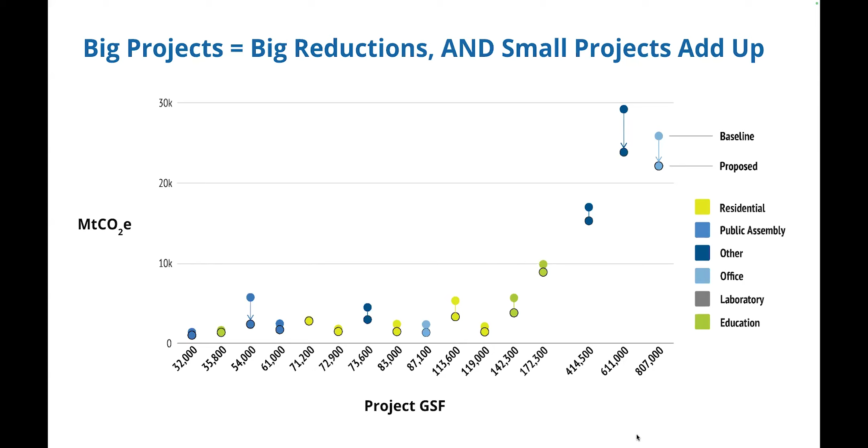About 50% of the participants, it was the first time that they were doing a whole building LCA. What we found was that the big projects had big reductions, but then all of the small projects, all of their reductions added up. And we really recognized that reductions were possible at every scale.

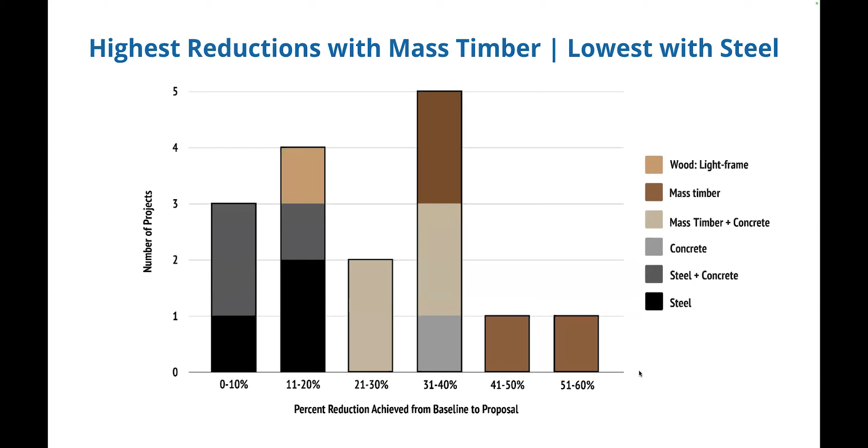We collected a group of judges, some of them who are on today, from outside of Massachusetts and around the country, who are experts in this field. And they judged the projects on 3 different things. Part of it was on the reduction in embodied carbon, but that wasn't completely it.

It was also on how replicable the project and the approaches were, and how cost effective they were, but then balanced with the innovativeness of the submission. So we really wanted to see how people could do innovative solutions. We wanted to recognize that, but we wanted things that other people could actually do. And so I'm going to pass it off to Aurora to discuss our winners.

Awesome. Thanks, Meredith. All right, so excited to share the winners with you all today. The first project we want to highlight here is the Sustainable Engineering Laboratories building. This building was meant to function as a national hub for UMass Amherst to accelerate clean energy research and educate young sustainable engineers. This project targeted ILFI Zero Carbon and LEED Platinum certification and took a really clever tiered approach to cost.

The first tier that they explored were opportunities that reduced both cost and carbon simultaneously. These were things like minimizing below-grade construction, steel tonnage reduction, and structural grid optimization. They found about $4 million in savings that were then reallocated to other project priorities. As the second tier, they looked at opportunities that had a very low premium that still delivered carbon savings, such as polyisocyanurate for the roof insulation and increased SCMs in the concrete mix designs.

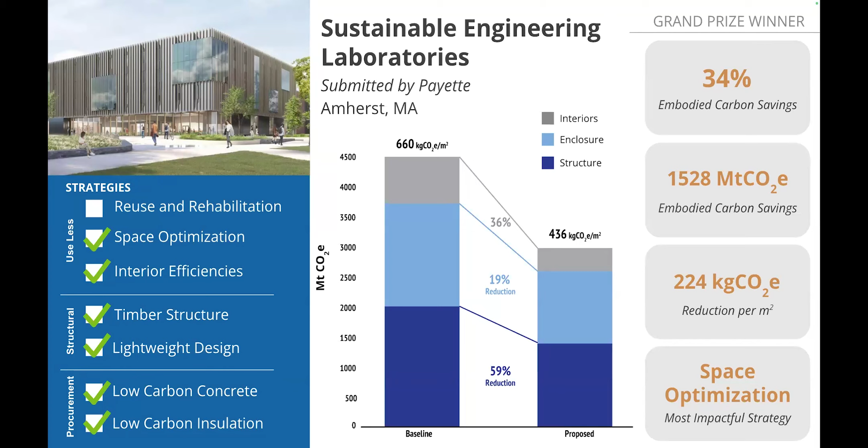They also looked at reducing floor-to-floor heights and optimizing the structural grid. They employed low carbon insulation, specifically polyiso instead of XPS for the roof assembly. And they redesigned their concrete mixes to replace about 50% of the cement with low carbon alternatives.

The second winning project is Jones Library. This is a renovation and expansion project with goals of improving safety, user-friendliness, and efficiency. Sustainability was a priority for both the owner and the project team from a very early design stage. Initially, this project had very high operational goals as well, including eliminating fossil fuels, being all electric and solar ready. So they really set the bar high there, and complemented that with early conversations about reducing embodied carbon.

They drove this forward primarily through the reuse of the historic structure, as well as parts of the interiors. And they designed an addition to complement the existing building that needed to be highly efficient, flexible, and compact to limit the area needed. The team says this is actually the smallest allowable size for the addition per the Massachusetts Board of Library Commissioners.

This team estimated about 30% embodied carbon savings with the same scope as shown previously, including interiors, enclosure, and structure. And the biggest strategies here were reuse and rehab. Reusing this existing building is hugely beneficial. And they also used hybrid timber structure.

This was also a case where timber is not a typical selection for a library because there's a high demand for acoustical control. And in this case, the team balanced the sustainability and acoustic requirements by creating a floor system that had a CLT layer covered by a resilient mat and 2 inches of gypcrete. They also introduced fly ash into that gypcrete to further reduce the carbon impact, and they explored other design opportunities as well.

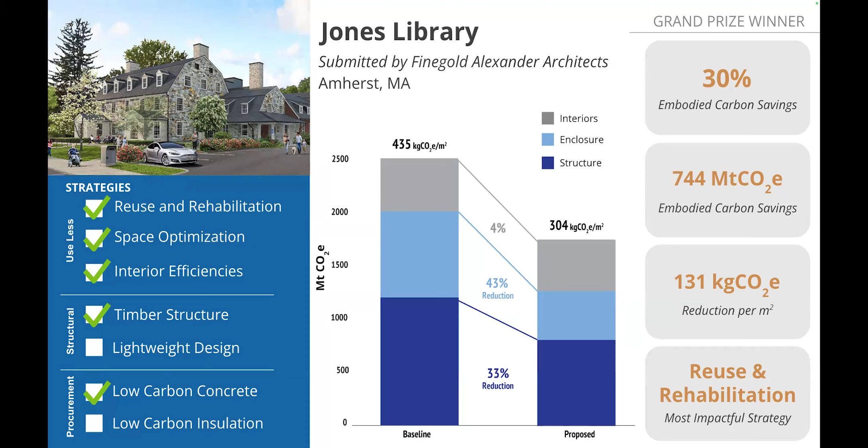Back to you, Meredith. Great. So all in all, we found that there were 7 strategies in these 3 different categories of low carbon strategies that we saw throughout the project. And we're going to use these 7 strategies in the 3 categories to guide the rest of the conversation. So for the next part of the conversation, I'm going to hand this back over to you, Bev.

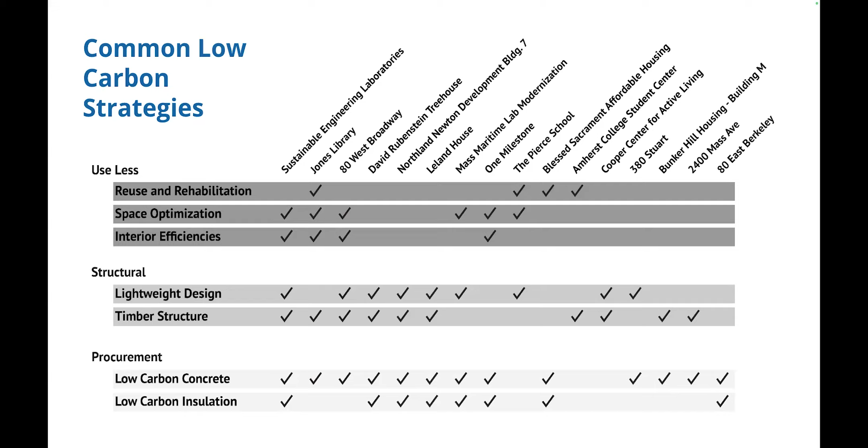Yeah, so Meredith mentioned these 7 strategies, and I think it's just really important as people who are obviously interested in embodied carbon who are showing up to this webinar to take a look at all 7 of these strategies on all the projects you're looking at. These are high impact, low cost things across a lot of different projects that were successful. They might not be successful in every project, but I think every designer should be thinking about all 7 of these as they go through and start on a project.

So I'm going to be talking a little bit about some examples and case studies of projects that are in this first category of using less. The easiest wins and the ones that were saving money, the way Aurora was talking about, often did propose less space. And so the using less comes in sort of 3 major flavors that we saw in projects. First, reuse and rehabilitation. Keeping existing structures, whether they were parking structures, foundations, sometimes just the structure, sometimes even just a facade.

Using less through space optimization. So basically building less square footage than the owner was originally thinking through creative stacking, using the same space for multiple purposes, and sometimes even adjusting ceiling height so that there was less volume of building built. And then using less through interior efficiencies. So we're going to talk first about reuse and rehabilitation, a case study.

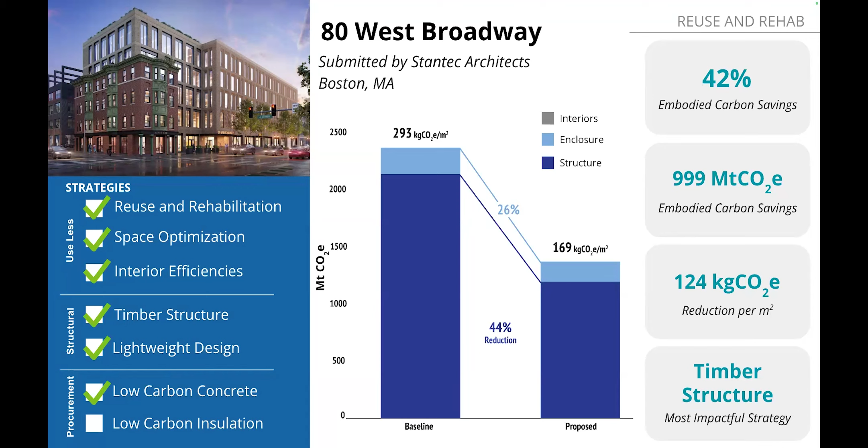And this project, even though I've been highlighting some of the strategies related to reuse and lighter weight design, also hit a lot of those other 7 strategies. You see the check marks on the left side, basically everything from low carbon concrete to interior efficiencies. So they really hit almost everything with this project. I will say, I've seen in New York City quite a few buildings where they keep a historic structure like this and build up and around it. So I'm seeing more and more of this going forward.

So space optimization is also another category of using less. And Aurora highlighted the 2 grand prize winners who are really very creative in using this kind of strategy. Jones Library and Sustainable Engineering Laboratory both featured really creative ways of optimizing the space so that there was less material, and then also ended up saving owners money. At Jones Library, that team multi-purposed several of the areas and were able to build less in that addition in particular than was originally proposed.

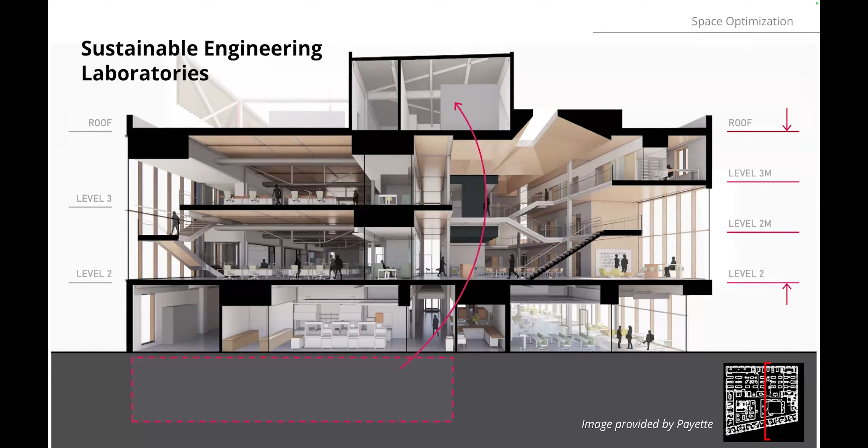And if you also take a look at the bottom in the red area, what was originally programmed as a subsurface basement for mechanical rooms was moved to the top of the building. And by repositioning that bottom space, the project used significantly less concrete, which really had a big impact as well.

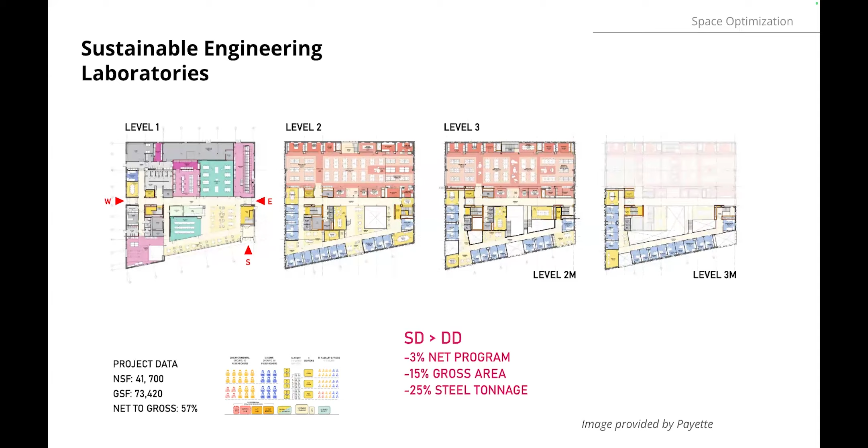Through better space optimization between schematic design and design development, this team was able to reduce the net program area by 3% and a 15% reduction in gross area. That actually led to 25% less steel tonnage. Again, by building less and space optimization, both the cost savings and an embodied carbon savings. And I'm going to hand it back over to Aurora to cover more interior efficiencies.

Great. So with interior efficiencies, we want to highlight one more detail about sustainable engineering labs. You might have caught me earlier saying the term CLT when referring to this deck, but actually this team went with dowel laminated timber, or DLT. And this project is a bit unusual in using DLT as a floor slab. And in this case, you can see exactly how they approach the acoustics through this section on the left here, where they basically created the DLT such that it was routed with grooves that accept the acoustical foam. And this delivered a noise reduction coefficient of about 0.7 from the structure alone.

This approach to allowing the acoustic system to be integrated into the DLT provided actually a slight cost premium over CLT, but it delivered cost and carbon and aesthetic benefits as a whole system together. This prevented the need for acoustical ceilings or acoustical wall treatment and had benefits for the construction fit-out schedule because that was accelerated for less trades. And in this case, overall, the mass timber remained visible without compromising acoustical quality. Very clever solution here.

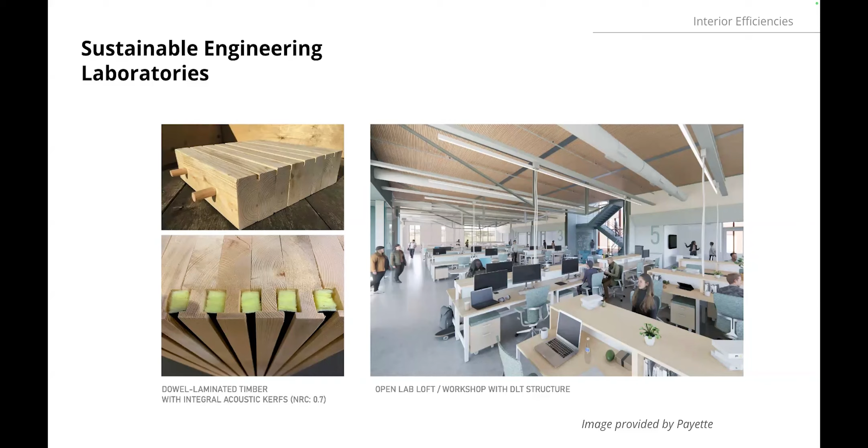The next 2 approaches we want to highlight are about structure. We're going to pull out the 2 primary themes we saw in the projects overall. The first was timber structure. We did see many projects across the submissions use timber in different ways. In some cases, this was CLT. It could also be timber stick framing or light timber framing, as well as applications like DLT. The second strategy we'll highlight is lightweight design. This included structural design efficiencies, grid explorations, examining different steel types and profiles, and exploring other redesign opportunities.

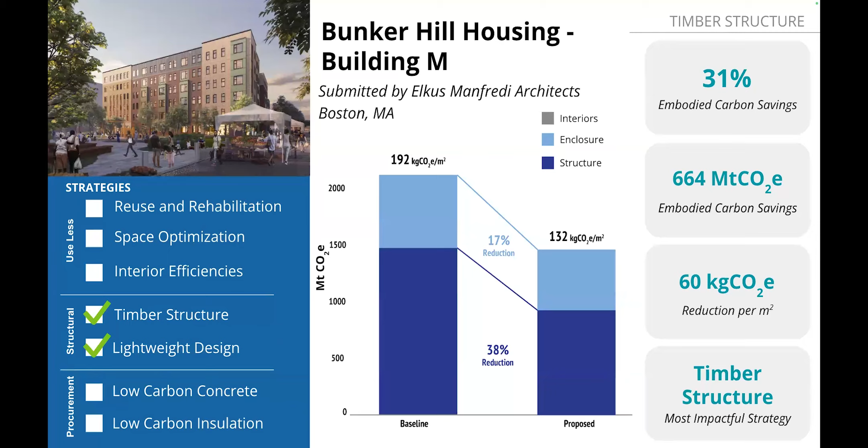Starting with timber structure, we're going to highlight Bunker Hill housing. This project estimated about 31% embodied carbon savings. And the primary embodied carbon reduction strategy, do you mind going to the next slide here? Thank you. The primary embodied carbon reduction strategy used here was a 7-layer CLT floor slab. This replaced all above grade floors and was actually in place of what would otherwise have been a standard concrete plank system. This approach was a standardization of the building components based on that use of the CLT, and this resulted in a significantly shorter construction period, reducing the cost of the project's general conditions and the interest expense in the overall development timeline. In this way, CLT actually realized cost savings compared to concrete plank. Because we highlight examples of timber everywhere else, we're going to leave that to one example here and switch over to lightweight design.

The example we want to highlight here is the Cooper Center for Active Living. This project estimated about 27% embodied carbon savings, considering the interiors, enclosure, and structure. This design team started early in exploring embodied carbon. During DD, they compared a majority timber frame building to a steel and concrete building, and they estimated about a 50% savings at that stage from that comparison.

They also estimated that that involved a significantly lighter structural system, about 50 to 75% lighter than a steel and concrete structure. And really, this overall lighter weight was the key on this project. They were able to reduce the size and weight of the supporting foundations and footings that also removed concrete volume from the project. But I think the most interesting piece of this whole story is that this lightweight design allowed them to eliminate otherwise needed ground improvement.

The soil conditions here were poor. There was about 8 feet of urban fill, and they would have needed extensive ground reinforcing, such as rammed aggregate piers with a heavier steel and concrete building. And for anyone who's ever modeled deep pier systems, they are extremely carbon intensive. So basically, by selecting a lighter building type using CLT and stick wood framing together, they were able to lighten up the whole building and select a different foundation system. So hugely significant overall.

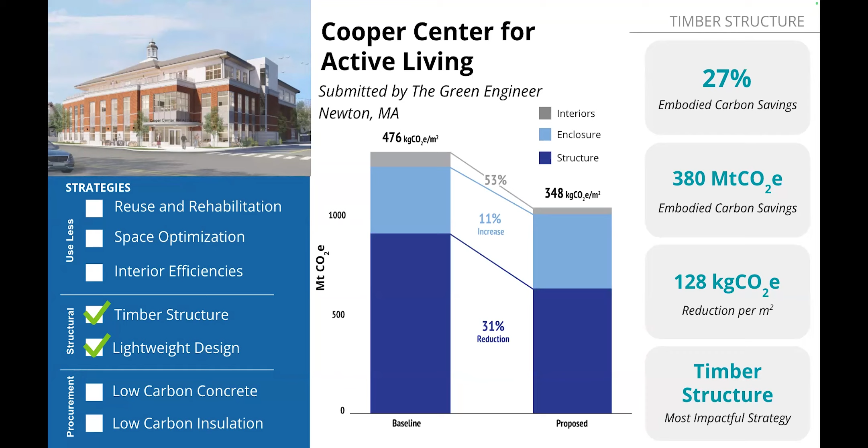All right, so the second project we'll highlight here is the Mass Maritime Lab Modernization Project. This estimated about 16% embodied carbon savings and really emphasized lightweight design. Overall, this project team was focused on avoiding overbuilding as a project priority from the earliest design stages. And they did this by really comparing different steel opportunities and looking closely at their concrete specs. So they looked at whether HSS columns or wide flange columns showed a higher embodied carbon footprint and how it contributed to the overall steel volumes or steel mass on the project.

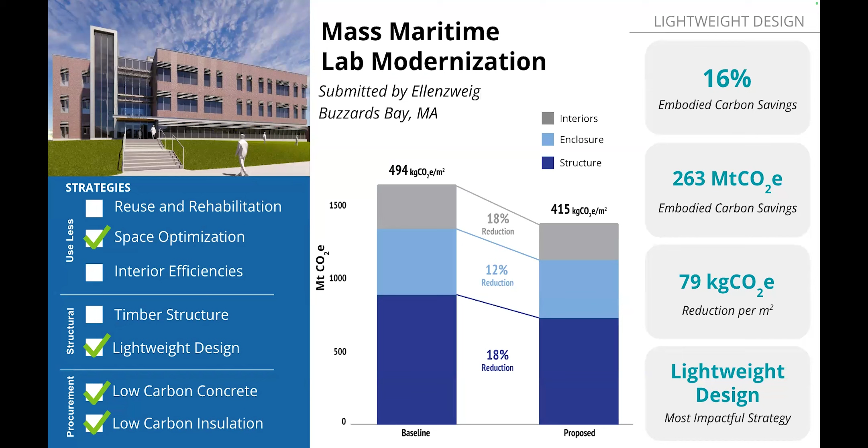And what they found actually was that the HSS columns, while they showed slightly higher embodied carbon, their reduced surface area minimized the need for fireproofing materials. And really, they decided that this meant that the 2 types of steel were very comparable in terms of their use as columns, and they ultimately opted for a mix of HSS and wide flange. As an aside, they also explored revising their concrete specifications and introduced a performance-based target into their specification, targeting a 25% reduction in GWP compared to NRMCA regional benchmarks.

Back to you, Bev. Thanks, Aurora.

So procurement. We talked about using less, we've talked about structural system approaches, and now we're going to talk about procurement approaches. And I think some teams tend to find this to be the easiest, and also they think of it as something that you can add later. And these kinds of approaches can include things like low carbon concrete, steel, gypsum, wood fiber instead of some foams, foam glass aggregate instead of XPS and gravel. And I think generally people tend to assume these are more expensive approaches when you go for procurement of lower embodied carbon materials, but that's not actually always true.

We're definitely seeing foam glass aggregate being less expensive in our Massachusetts market as compared to XPS and gravel. Wood fiber continuous insulation prices in the Northeast, especially as TimberHP's product comes out, are going to be on par with mineral wool. And with low carbon concrete in Massachusetts, we tend to be finding that a 20% carbon reduction in mix designs as compared to the Northeast benchmark is possible without much cost impact, if any at all, as long as you're starting early enough in the project.

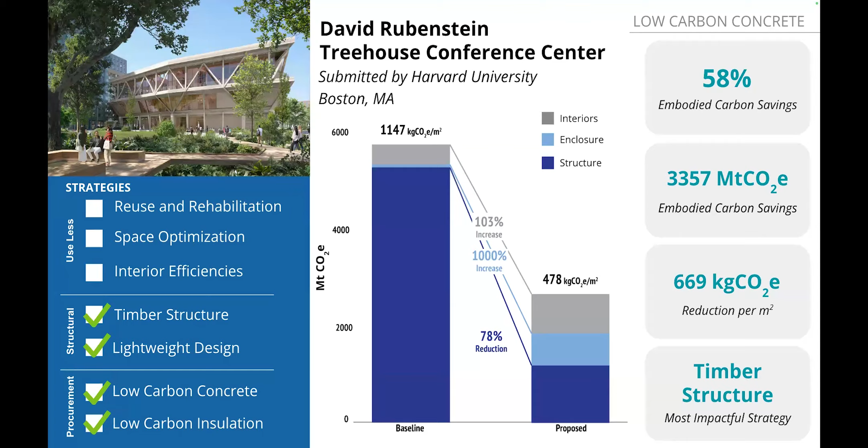We also saw quite a few examples of low embodied carbon insulation products used throughout. So 2400 Mass Ave is a 6-story new construction development in Cambridge that will add 56 residential units and retail. And it achieved approximately a 34%, 36% reduction, mostly by switching out polyiso insulation products for wood fiber products.

Bio-based materials, when they can be replacing foam products, particularly foam products that have a high global warming potential blowing agent, is a really good strategy for reducing insulation procurement impacts related to embodied carbon.

And though it wasn't used on this project, we have been definitely seeing a lot more, as I mentioned, projects in the Boston metro area switching out XPS subsurface, using foam glass aggregate as a replacement of XPS plus gravel.

I actually know from our passive house work of 2 general contractors who at first were resistant to the idea of using this, then used foam glass aggregate, either Glavel or Aero Aggregate, and were really happy because it meant coordinating a lot less subs, and it ended up being less expensive as well.

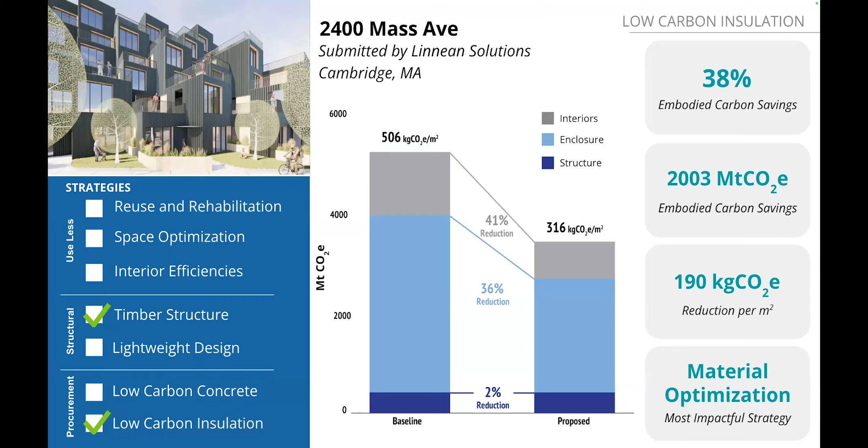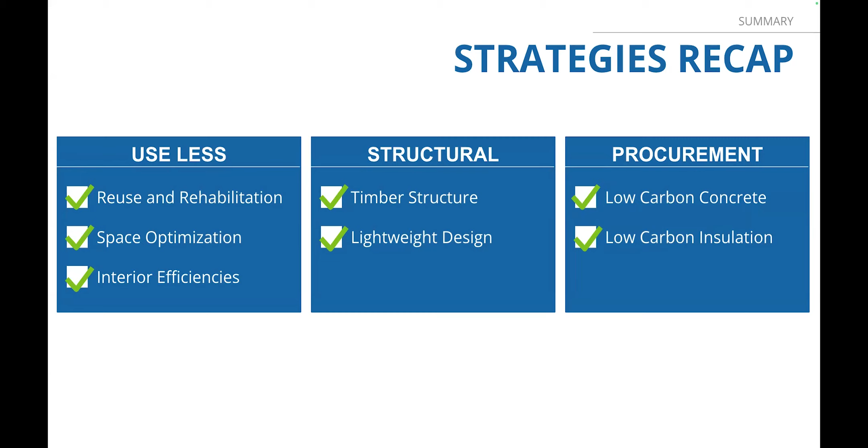And so, like I mentioned at the beginning, these are the 7 major areas that we've given you case studies showing different examples. This is really your guidebook as a designer for what you should be thinking about. If embodied carbon reduction is your goal, we all need to learn how to do whole building life cycle analysis too, but I think some of these are just common sense strategies that we should be thinking about across the board. High impact, low cost strategies. And we're going to move on to lessons learned from some of the design teams, I believe.

Absolutely. There's a couple questions that have come up in the chat that I thought we'd cover maybe before we moved on. Someone's asking about why no fly ash in the treehouse. So Harvard, I think, is concerned about the possible leaching. You know, there's not a lot of analysis of what is in fly ash composition. Obviously, it's from coal plants, and so it's probably not the best thing in the world.

When you put it in concrete, at least it's stuck in something. But I think sometimes people worry about the health-related impacts. And also, fly ash is becoming less common, right? As we get rid of coal plants, it's no longer going to be there. So I think that was a choice that Harvard made that not everybody else would necessarily make. I know in the early LEED days, we always wanted to put fly ash in instead.

So great, thanks, Bev. And then Aurora, there was a question about whether the projects included biogenic carbon or not in their calculations.

And I remember that there was 1 or 2 who did, but people need to remember that we wrote these recommendations, the challenge requirements, in 2022, and that we actually left things a little bit loose and not entirely strict, so that we could really encourage people to be creative and to think outside the box. And we wanted to see what people would come up with. But I was hoping that you maybe add some additional insight about biogenic carbon and how it was included or not included here. Yeah, sure.

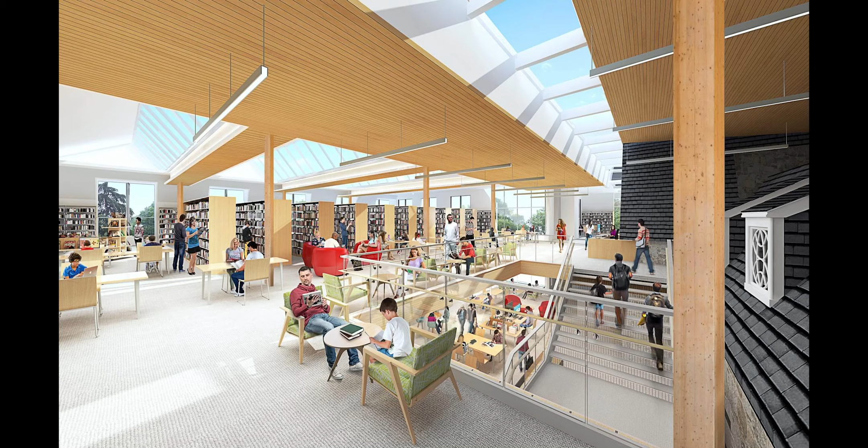Thank you. So I am Megan Brown with Feingold Alexander Architects. We submitted on the Jones Library project, the renovation project. Yeah, so when Meredith asked me to come up with some lessons learned, there were so many that I could highlight, because honestly, one of the biggest hurdles I think in our industry is just doing this work and starting it. And so props to the competition, because forcing us to get in and do an embodied carbon study was invaluable. It's not something I could have learned in a presentation. Just doing the work was a great way to learn.

And so that said, it was the first project in our office that we did a whole building life cycle analysis on. Not the last, but it was the first. And one of the greatest advantages that we found thinking back on this was starting to talk about embodied carbon early with the owner and the design team. So there were conversations about sustainability and goals early in design. People started talking about embodied carbon during schematic design, which allowed us to explore options like a hybrid timber structure.

If these analyses only happen later in design, some of these big design moves are not possible. The depth of the timber beams impacts floor to floor heights, overall building heights, space for mechanical ductwork, things like that. I know Bev mentioned many of these low carbon materials aren't easy to just add on later in design. They have a lot of implications on it. So that was one testament of the importance of integrating sustainability conversations early and continuing them throughout the design, of which this whole building LCA that we performed just helped to further emphasize what we could do and keep us on track, I guess.

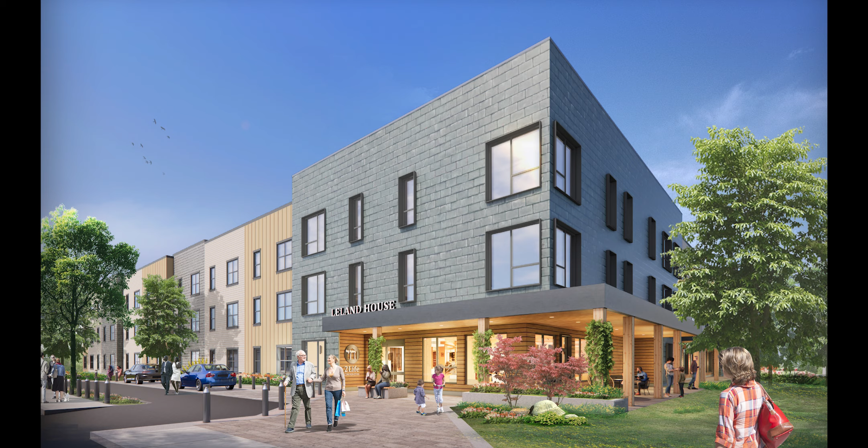Great, thanks, Megan. And I know we also have Juhi and Ben was on here, but Juhi, I think it's over to you now. Sure, absolutely. Thanks, Megan. That's so great to hear the background of that project.

So it's really interesting. I'm Juhi Goel, I work for PCA, and we submitted Leland House as our competition entry. We actually had a slightly different premise wherein some of the larger impact decisions on the project had already been made by the time we were working on the competition. But they were made entirely based on assumptions and hunches and what some of the project team had learned about some specific products. And so the competition really gave us the tools, the training, and the shared knowledge to understand the impact of some of those decisions, change what we had control over.

But what we ended up doing with the competition is we submitted a baseline, a proposed for what was being done on the project, and a third category, which was a lessons learned category, where we really had free rein to start exploring what we could have done if some of those decisions could have been made earlier on. So we learned, for example, that the Glavel insulation for underslab when compared to XPS was a significant carbon savings. And that actually did a lot for us as a firm, because this was our very first dive into LCAs and looking at the carbon impact of specific products and decisions.

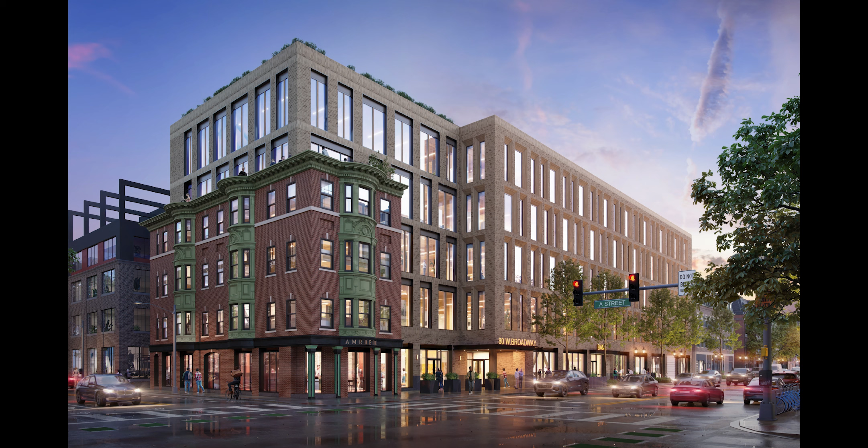Thank you, Meredith. I think Megan and Juhi already mentioned quite a lot of points, which was something we definitely looked at as well in terms of embodied carbon, like starting to think about embodied carbon at the early stage. We didn't start doing a whole building life cycle analysis at that point itself. We basically had taken different

studies to see, okay, do we want to be doing a hybrid versus entirely mass timber or maybe just steel? And doing the comparison at an early stage was really helpful for us to understand that it could benefit us financially with cost, but also with embodied carbon.

And then we also started thinking about, is this height really needed? What was the program of the building? Could we condense the program as much as possible? Because we do not really think about that when it comes to embodied carbon, but it definitely does play a huge effect as well. If you don't need a particular space and we're just building it, what's the point?

So we reduced the height of the building significantly, and we also reduced the amount of spaces which we required, fitting different kinds of spaces in to make it more collaborative. I think the space planning exercise was really helpful when we eventually started to look at embodied carbon, that we did make a significant amount of changes, and that helped in reducing embodied carbon as well.